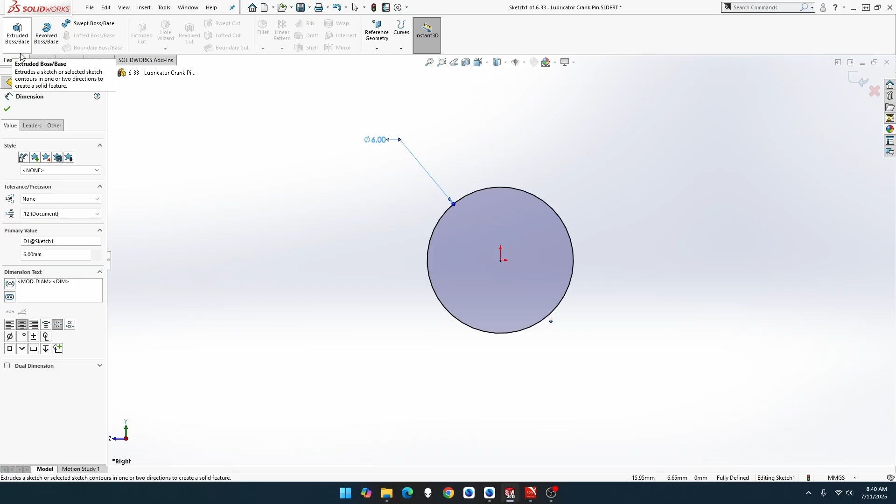This episode, we're going to build part 6-33, Lubricator Crank Pin for the Clayton Undertype steam wagon. Let's go to File, New, Part MMGS. Alright, so we're going to do right plane, sketch. It's going to be circle. It's going to be 6 mil. 6 mil, and that's going to be length of 24.

Doesn't really matter, we're going to do mid-plane anyway. Let's change that over to appearance, metal, steel, brush. That'll do. There we go. Alright, so now let's do a plane just from one end. That's all we need, one end. We're going to thread the whole thing, but part of it's going to be covered up, so it doesn't matter how the thread looks at that end. But this is the end that's going to be visible. So let's do, that should be 10 mil, yes it is.

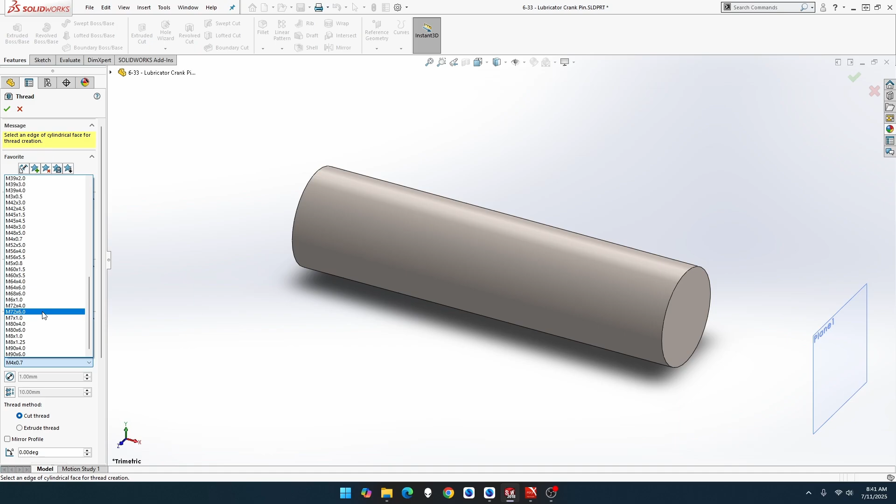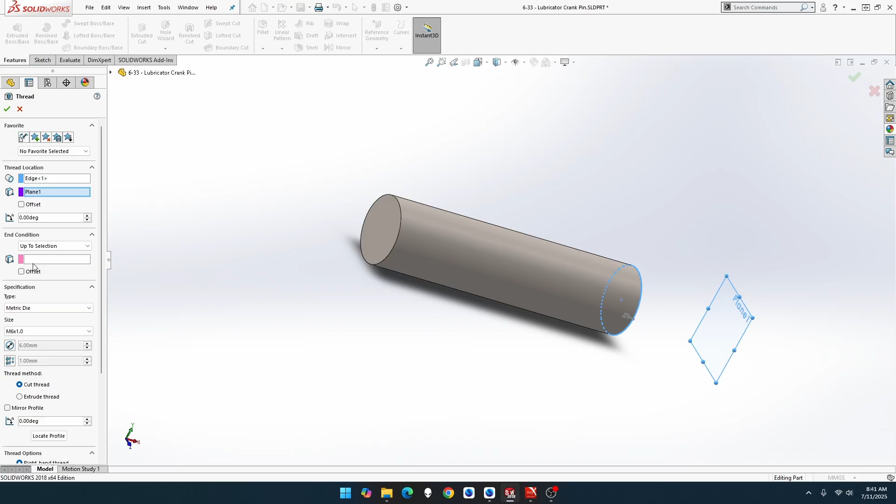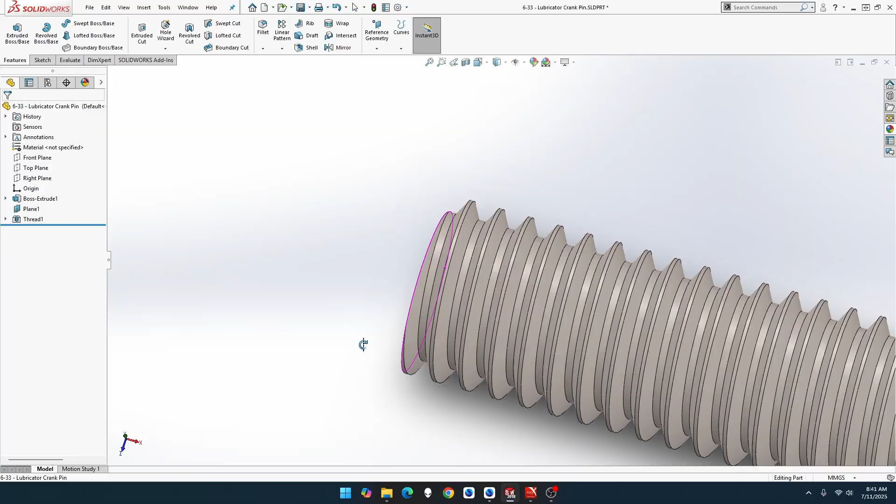Now we want to go to thread, which is, well, let's say 6. We had 4, let's go back to 6. M6 by 1.0. So we want this circle. We want the plane. And we want the other plane. And that should be cut. It is beautiful. Actually, that didn't work perfectly. Hold on. We'll do it. Yep, that did too, actually. That's fine. Okay, that's fine.

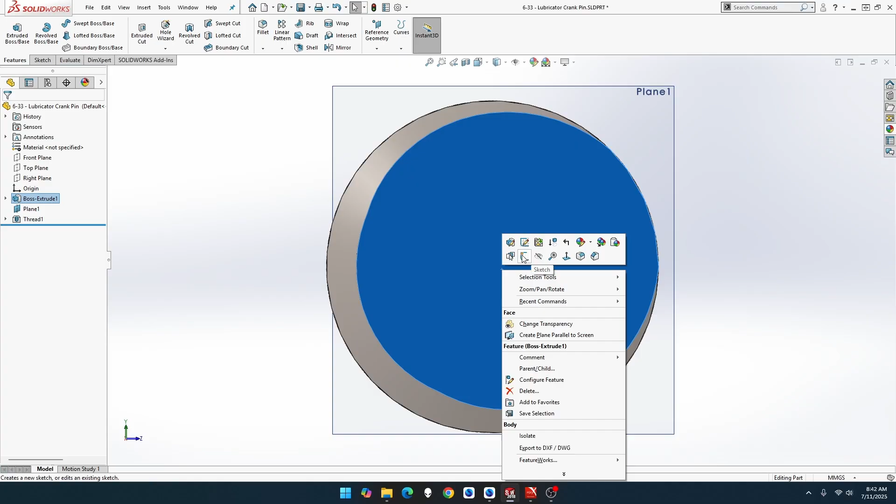I'm just going to leave that plane there for the moment. I know a few times I've had it where this has gone fully around, it's kept closed in, so technically you can't screw anything on. That's why I always like to do a plane there. Okay, so this here, we're going to go to normal, sketch. We're going to do a circle, I believe. Yes, it is. Okay, they're all circles.

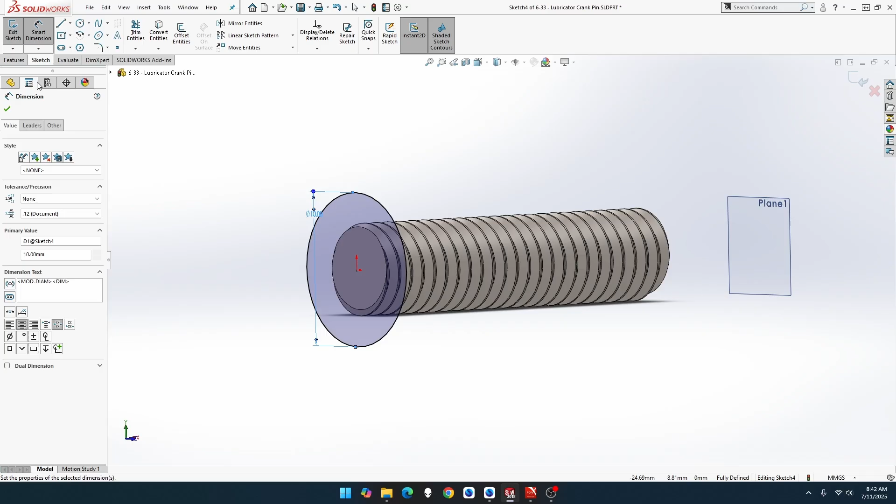That's going to be 16. It's a smart dimension. 16. Oh, sorry. Nope, not 16. 10. That looks too big. 16's the next circle. That's better. I'm looking at this, it looks way too big. Okay, so once. Come on. Extrude, but we want to extrude the other way. We'll extrude back in, but it's going to be extrude by 8. 8. And, excuse me. Done. Beautiful.

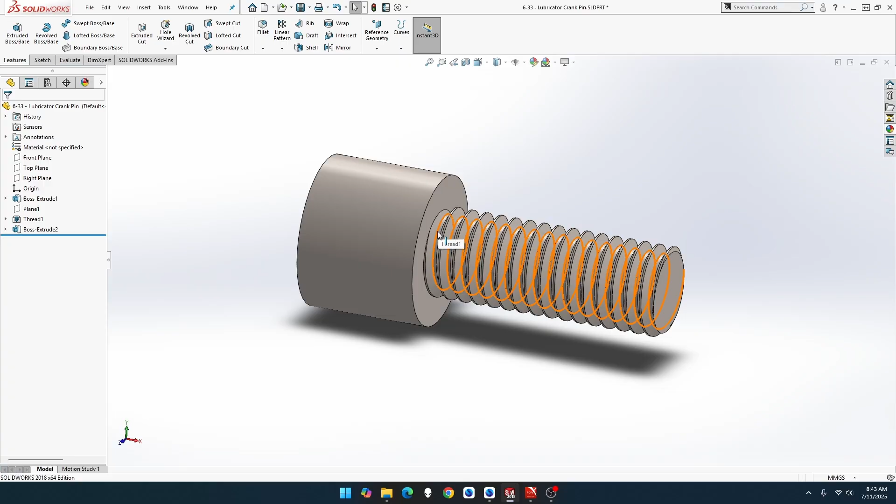We can now hide that. We don't need any more. There you go. Now, if I had this built here and I thread it down, it virtually doesn't go all the way. You either got to dig in or there's a solid bit there. So that's why I do it this way. That's why I put thread in, then bring this part back. Or the head, whatever it is.

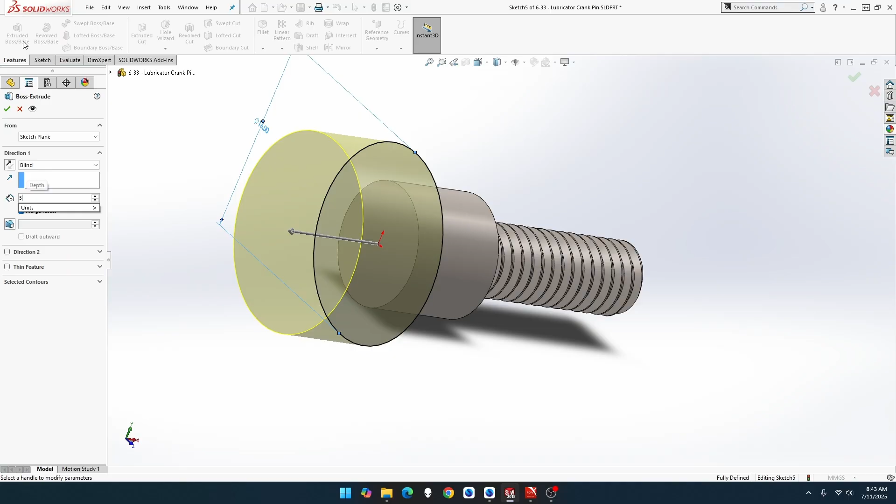We need one more. I'm not going to normal, just going to do sketch. Now this one is 16. My apologies on that. 16. And that's going to extrude that by 5. And done. Now let's do normal 2. Sketch. Now we want to do a box. Going to put 2 boxes in.

We're going to do, those two are going to be horizontal, try and get them equal. That's one. Nope, that's one. Now, these don't matter what size they are. Let's just do that up there, that down there. But what I do want is this dimension from this point to this line will be 6. Oh, if I click right, 6.

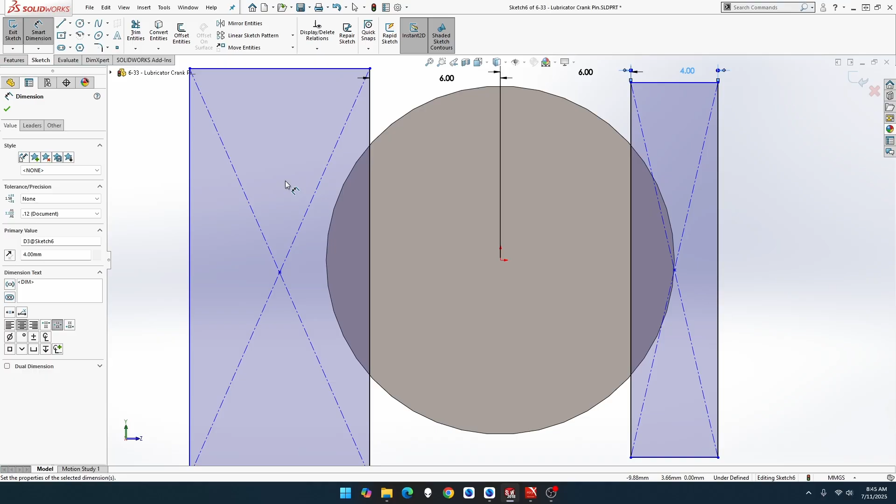There we go. And the same this way. This line to this point will be 6. Now it's covering up. That's all I need. I don't need to dimension this because I'm cutting this away. So this measurement here does not matter. Now, if you really want to keep it nice and tidy just for reference, just put numbers in there. That's fine. But I'm not worried about that because these numbers will not be used on the final blueprints. So it does not matter.

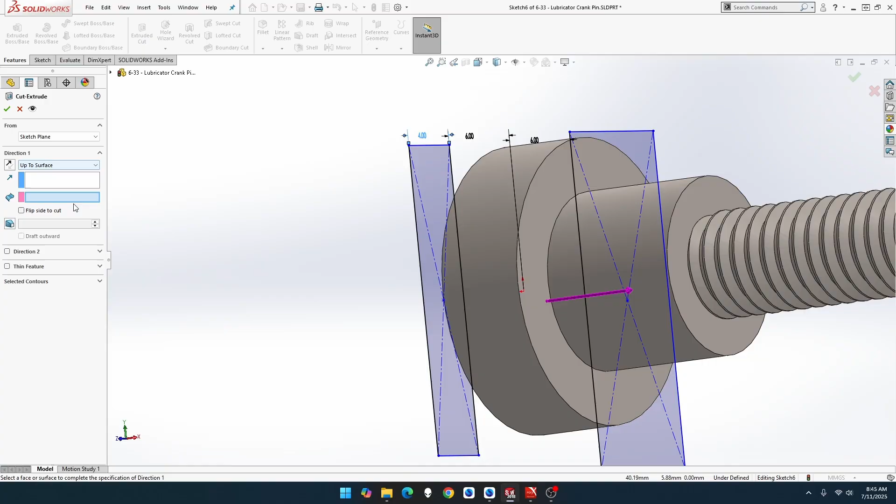But let's do there. We can go to extruded cut. We can go up to next, or we can go through all because nothing's going to be cut in these ones. They're smaller. But if you want to, you can always go to up to next or up to surface, and I click that surface. There's different ways to do it. Depends on the situation. There we go. That is done. Let me zoom into that. There we go. Perfect. All right, that is done.

Yes, it is. Perfect. So that's part 6-33, Lubricator Crank Pin, done for the Clayton Undertype steam wagon.